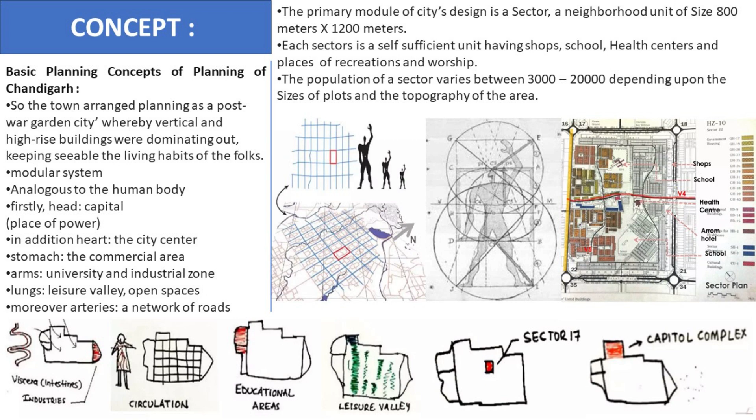The modular system was planned analogous to the human body. The first thing was the place of power, the head, which had the capital complex. In addition, the heart, the city center, sector 17, was there. The stomach had commercial areas, arms had university and industrial zones on the sides, and lungs had a leisure valley and open spaces, whereas arteries were a network of roads.

Coming to the formulation of the new plan, done by architect Corbusier: he kept the orientation of the grid as it is, with one off-centered axis. The grid of the superblock increased in size to 1200 by 800 meters, accommodating up to 25,000 inhabitants. Within the superblock, the centralized market was replaced by a continuous bazaar street across the block. The capital complex and High Court were combined into one government complex.

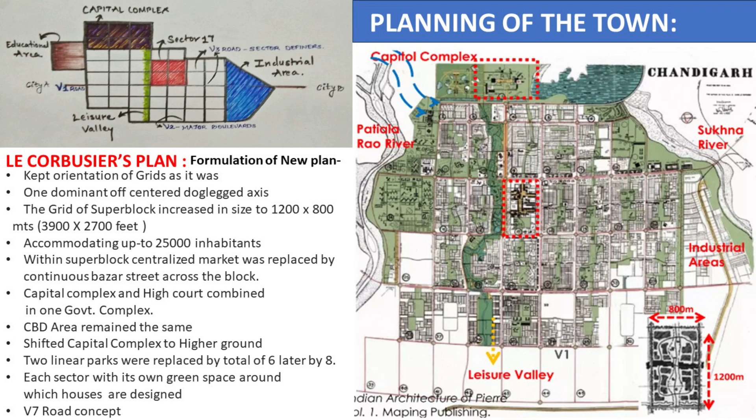He designed the capital complex in the foothills of the Shivalik. Then coming to the city center, it was in the heart of the city, with the industrial area and educational area on both sides, and the leisure valley below the city center. Every area had its own open spaces.

Now talking about the planning of the town: the city of Chandigarh is planned to human scale. It puts us in touch with the infinite cosmos and nature. It provides places and buildings for all human activities so citizens can live a full and harmonious life, where the radiance of nature and heart are within our reach.

As you know, the city of Chandigarh was composed of sectors. Each sector was 800 meters by 1200 meters, enclosed by roads allocated to fast mechanized transport and sealed off from direct access from houses. Each sector caters to the daily needs of inhabitants, ranging from 3,000 to 25,000, and has a green strip oriented longitudinally, stretching centrally along the sector in the direction of the mountains.

The green strip should stay uninterrupted and accommodate schools, sports fields, walks, and recreational facilities for the sector. Vehicular traffic is completely forbidden in the green strips, where tranquility shall reign and the curse of noise shall not penetrate. Now let's discuss the V7 road network planning.

Le Corbusier's traffic system followed Mayer's lines but was more elaborate. He called it Les Sept Voies de Circulation, or the 7 V's. The roads of the city are classified into 7 categories known as the system of 7 V's. The horizontal lines you see along the plan represent the national highway connecting Chandigarh with other cities like Ambala, Kharar, and Shimla.

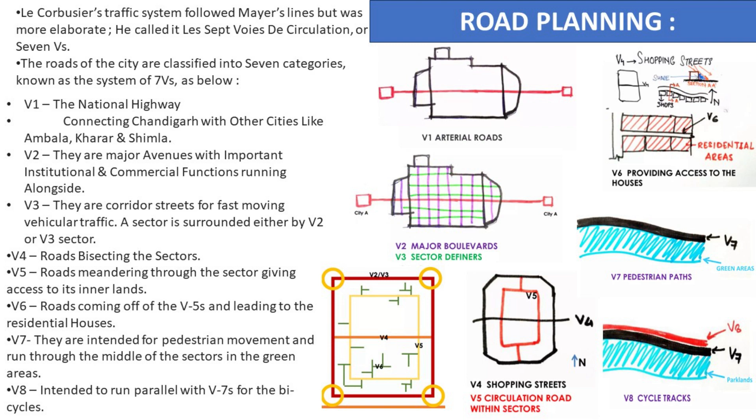Coming to this sector planning, you can see there are shops, schools, healthcare, and hotels. V4 is your intersecting road. In this plan you have government housing, then healthcare, shopping sectors in blue, then residentials in yellow to orange shades, and the pink one is your cultural building.

In total there were 30 sectors, of which 24 were residential, 70% private buildings, forming an autonomous unit including housing, schools, shops, and recreational spaces. Capacity ranged from 3,000 to 25,000, surrounded by high-speed roads, with bus stops every 400 meters, so no pedestrian needs to walk more than 10 minutes.

The criticism of this planning was that it was a self-contained sector with all essential services within walking distance, providing safe space for children - safe yet boring, with confusing streets that discouraged walking. It was called un-Indian yet an inspiration for architects, lacking characteristics like street culture, the excitement of Indian cities, the noise of Lahore, and the intimacy of Delhi.

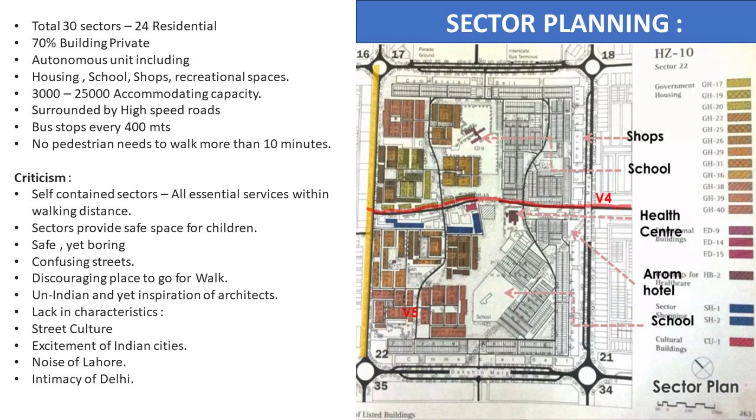So now coming on to the housing.

In Chandigarh, lower category residential buildings are governed by a mechanism known as frame control to control their facades. This fixes the building line and use of building materials. Certain standard sizes of doors and windows are specified, and all gates and boundary walls must conform to the standard design. This particularly applies to houses built on small plots of 250 square meters or less. While they are allowed certain individuality, the idea is to ensure that the view from the street, which belongs to the community, is one of order and discipline.

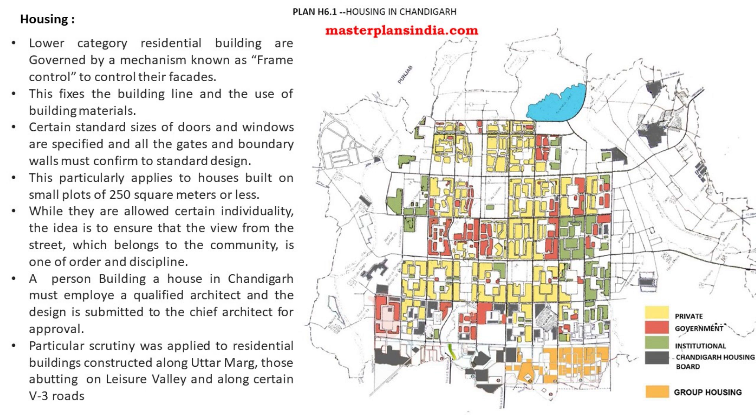A person building a house in Chandigarh must employ a qualified architect, and the design is submitted to the chief architect for approval. Particular scrutiny was applied to residential buildings constructed along the Uttar Marg, those abutting the Leisure Valley, and along certain V3 roads.

Now talking about commercial buildings. All buildings located in the city center and commercial or institutional buildings belong to the architectural controls. This system of the city center is based on a grid of columns fixed at 5.26 meters, a shuttering pattern on concrete, and a system of glazing or screen walls behind the line of columns. The interior planning is left to the owners, and on the exterior, certain variations are permitted to give variety to the architectural composition. Along the V2 roads, other types of treatments have been evolved for facades. All commercial buildings and all buildings constructed along the V4 roads in other sectors are also under strict control. For shops, complete designs have been provided from the inception of the city.

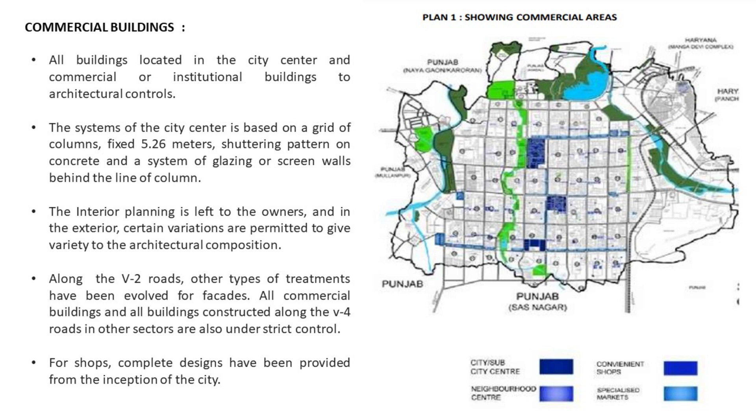Now let's look at the educational institutes. An entire zone, Sector 12 and Sector 14, has been designated as institutional area, and the institutes for higher learning in the master plan include the Postgraduate Institute for Medical Education and Research, Punjab Engineering College, Punjab University, etc.

Coming to the industries, an entire zone has been designated as industrial area in the master plan. The site for the industrial area was chosen according to the prevailing wind direction, so the wind blew the smoke away from the industries and it could never enter the city.

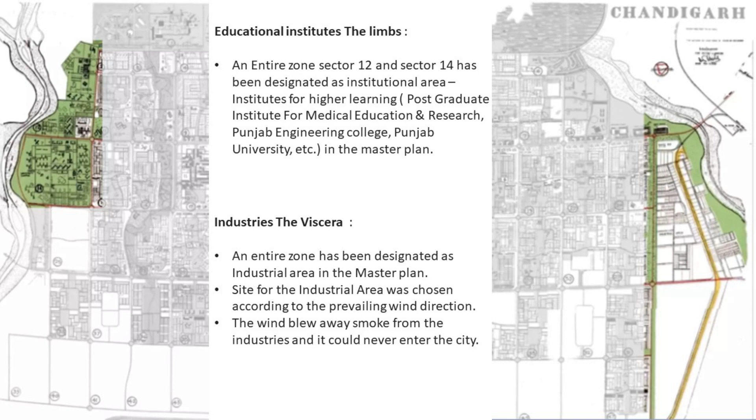Now coming to the landscape area. The landscaping of this capital is based on careful observation of the vegetation of India. Selected ornamental trees, shrubs and climbers have been planted according to color schemes to beautify it. In future planting and replacements, these principles must be kept in view. There should not be any haphazard replacement, so that the avenues retain their harmony and beauty.

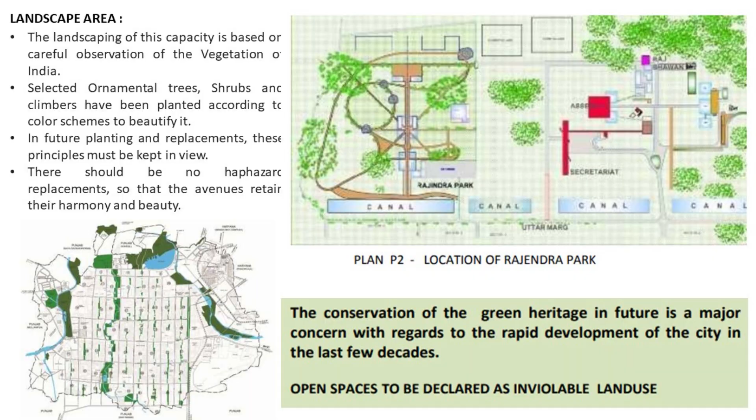Now discussing the Leisure Valley and the lungs and open space of the city. The Leisure Valley, an 8 km long stretch along a seasonal rivulet, is a green sprawling space extending northeast to southwest along the rivulet gradient, and was conceived by Corbusier as a lung of the city. Apart from large public parks and special botanical gardens, it houses a series of fitness trails, amphitheaters and spaces for open air exhibitions.

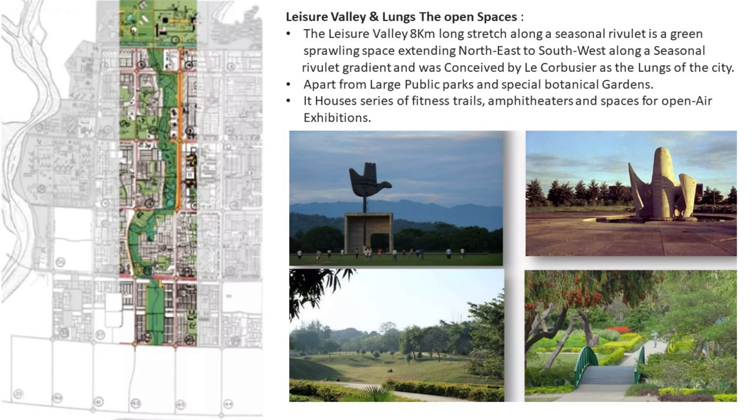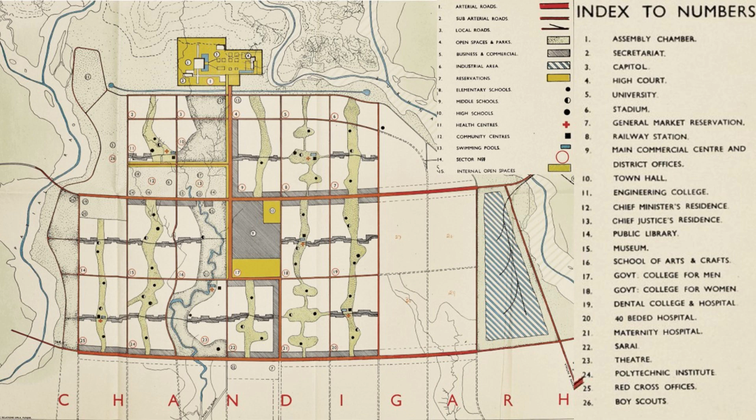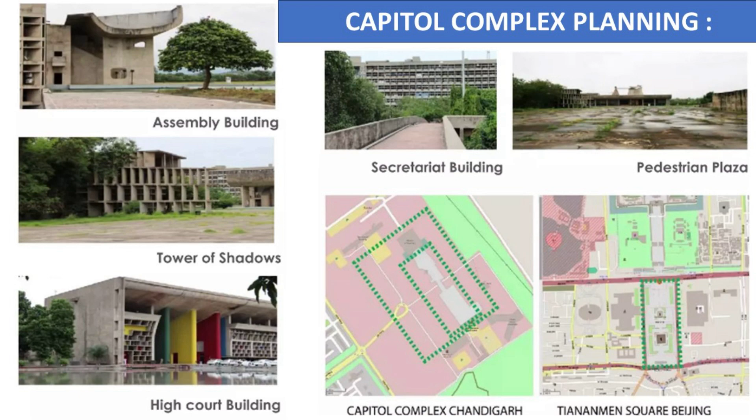Now talking about the Capitol complex. Chandigarh Capitol Complex houses the seat of government. Initially it served as the seat only for the government of Punjab, but now it has the headquarters of both the government of Punjab and Haryana. The Capitol complex comprises architectural masterpieces like the Secretariat, the High Court and the Assembly Building, and it has that one giant metallic sculpture of the Open Hand, which is the official emblem of Chandigarh.

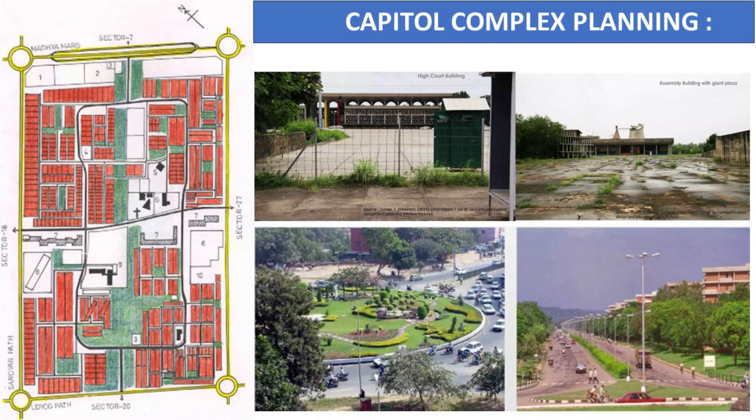In the next case study, we will be discussing the Capitol complex and the planning and designing of the Capitol complex.

So the conclusions: technology should be a part of the planning process. A city as a settlement of community cannot be standardized as a multiple of generic units like sectors. New city planning should establish a relationship of the site with people and their roots, who put soul into the city, otherwise it will be a dead city. People must be given expression in terms of planning and designing where they live and where they work. Urban character can only come out of the collective will of people. Icon status is not achieved by a city due to designers' vocabulary, it is achieved by the adaptiveness of people.